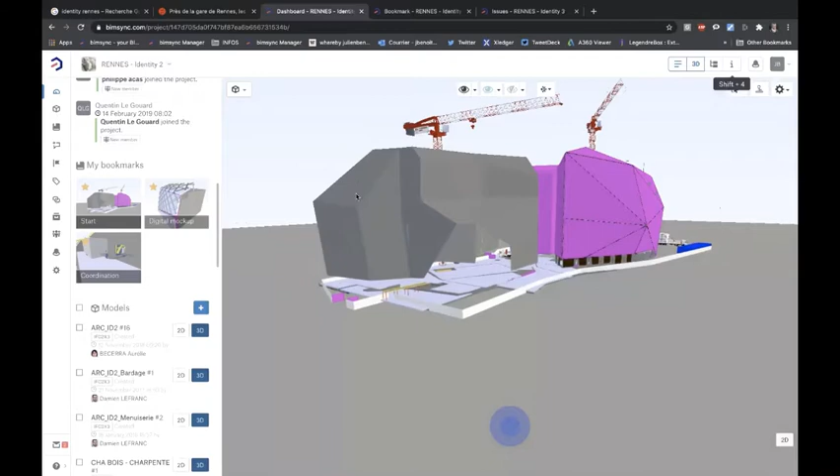I will start with one of these buildings, and I will strip it down in a way so you can see how many models it has been consistent of, and explain a bit what's been done on the project.

So you can see here that this is a focus on the number 2 building. So this is number 1, number 2, and number 3 in the back. I will focus on this one for now and show you different aspects of it.

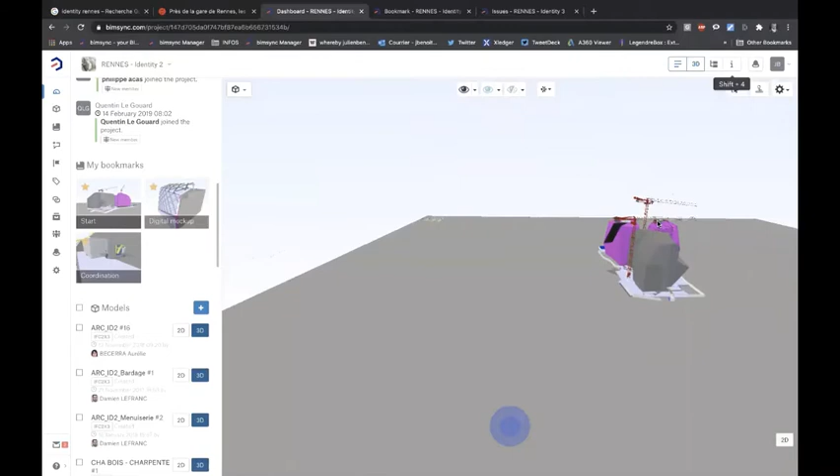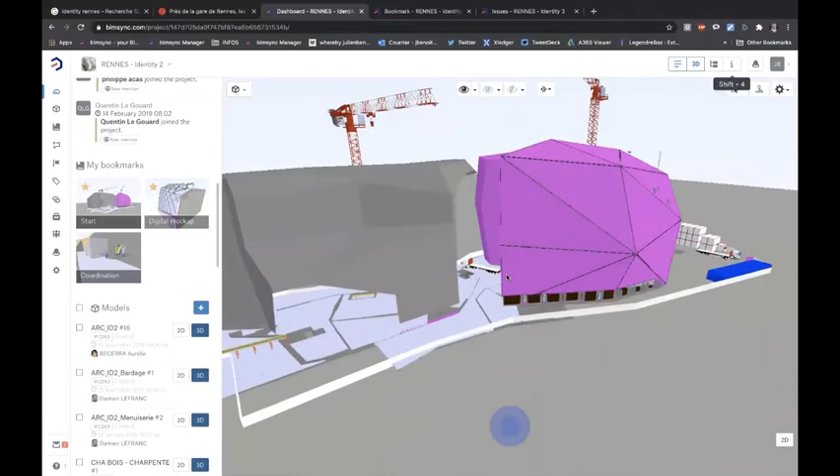As you can see, it's also been assembled with the site installation for better understanding of health and safety on site and security assessment. So it was kind of needed to have this in place. There's a lot of nice detail in this model, including the site installation, formwork, storage area, trucks, and all that. It's kind of cool to see an advanced, detailed project like that.

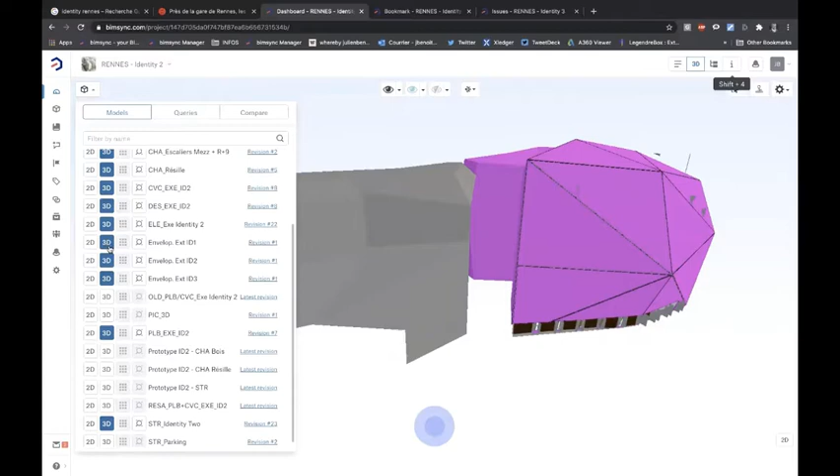So let me show you a bit more about this very building, number 2. I will remove from the viewer some of the unnecessary models - the parking lot, the installations on site, and the mock-ups for the 2 different buildings. So here we go, we have only one building now.

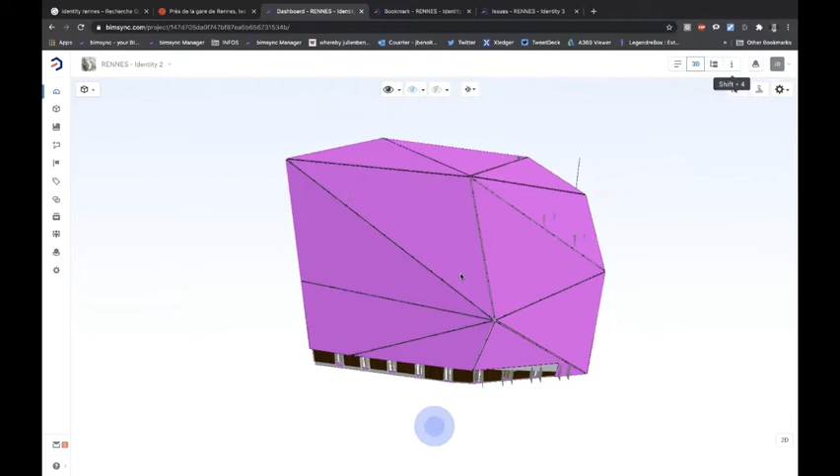So the strange colored shape you see was issued by the architect as the global or overall shape you shouldn't go through, like the concept shape you need to follow. Now, stripping it down, you will discover how it's done. This is called the envelope, the overall shell of the building. As you can see, the shapes are a bit crazy.

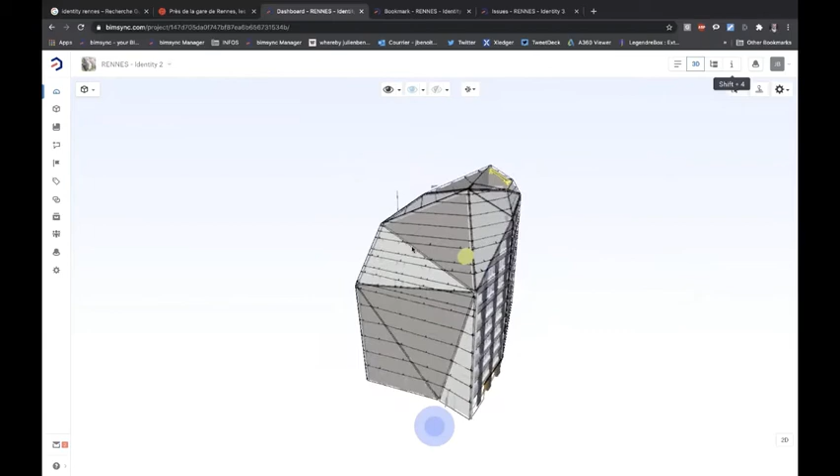It's like it's supposed to represent a broken stone, broken into 3 parts. So this is one of the parts of the stone. You have tilted walls, tilted facade, straight facade, and all that. There's a lot of interesting details here, and the composition of the facade itself is also complex with many layers.

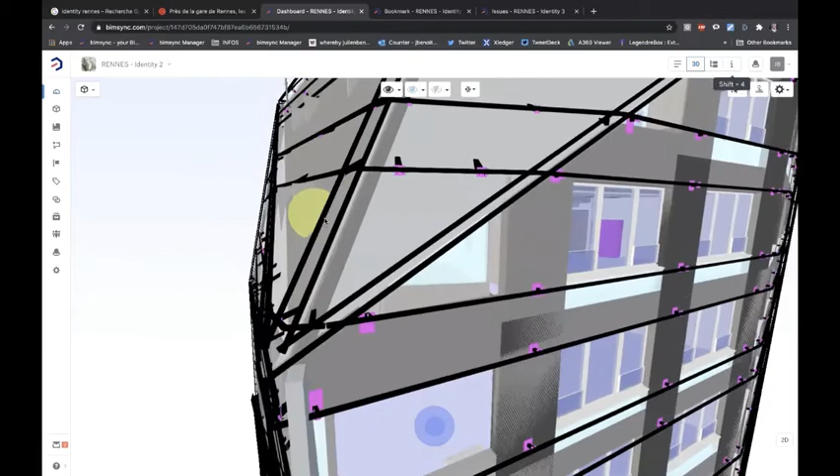I will zoom in a bit, and you will see the level of detail achieved by these models. As you can see, it's an as-built model - it's really what's been put into place by the subcontractors and the contractors.

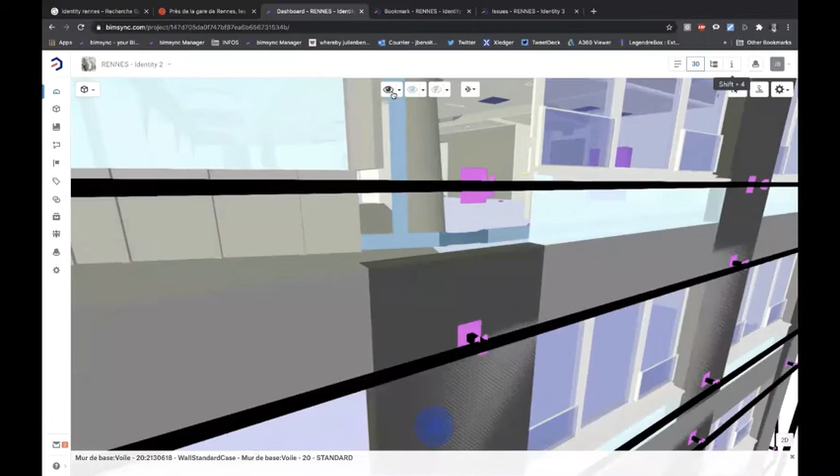So you can see the supports for the framing system, and you can see how detailed these models are. It's not perfect, could be better, but for the time - it's been like 3 years ago - it was just quite impressive.

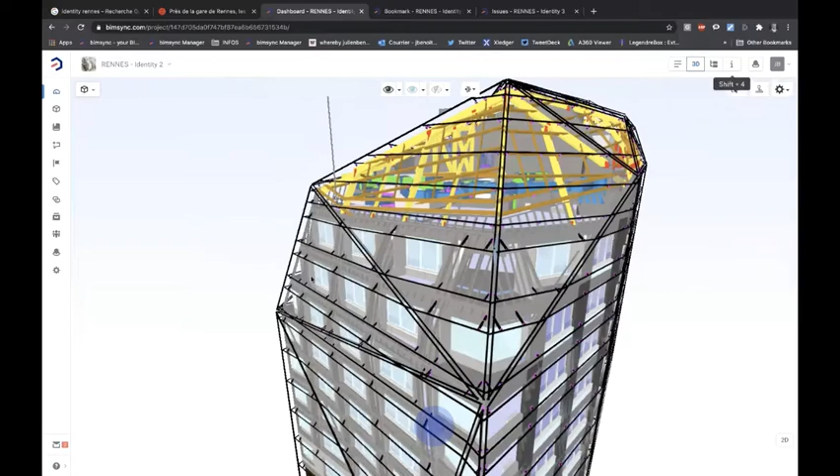So now I will give you a closer look on how it's been assembled together by removing the models one by one. This one, for instance, is like the overall shell, and now you can get a grasp on how detailed this project is. You see there's steel framing involved with these elements coming from Tekla Structures.

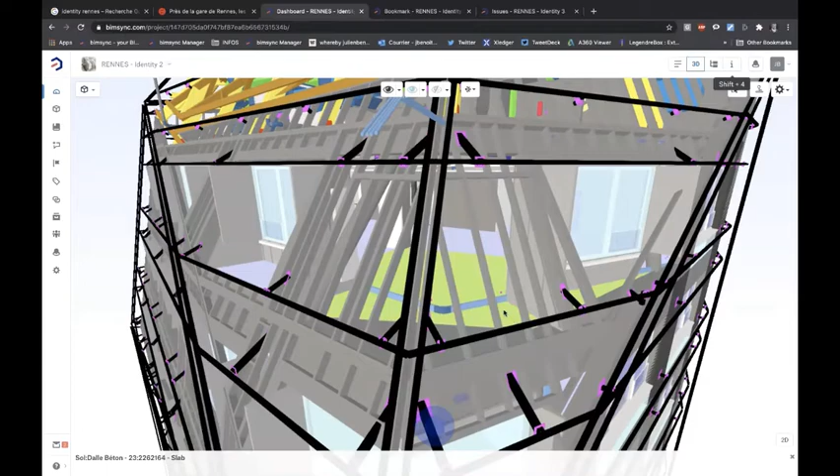These elements are wooden framing elements coming from cadwork software. And the rest is assembled on top of a concrete structure that was modeled in Revit.

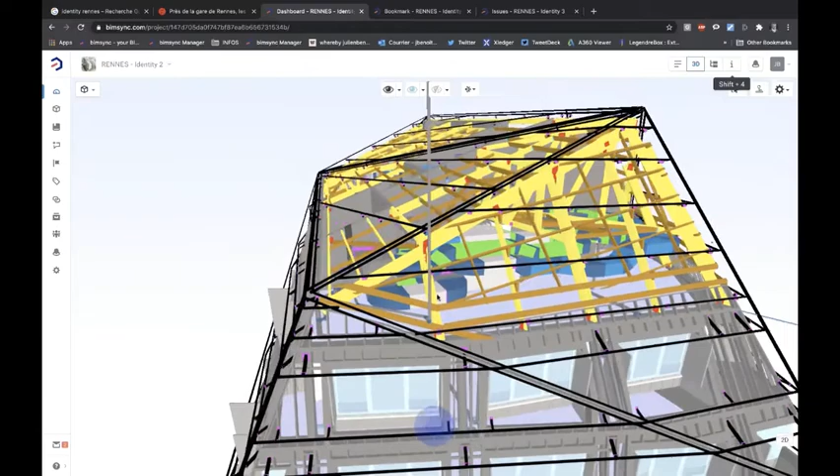So this is for the structural part, and all these elements have been put together in this model so we can actually have proper coordination, because from these crazy angles and crazy shapes, there's no way one can achieve proper coordination without models.

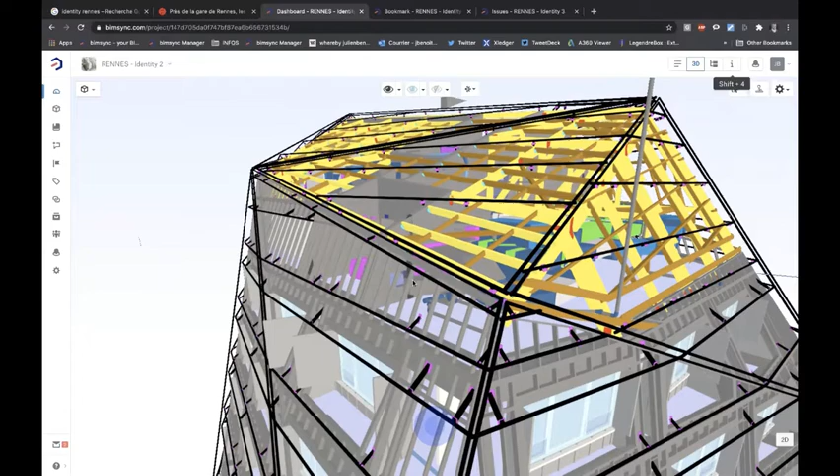You could try with drawings, but it will fail at some point, because it's been basically designed by a software that is able to deliver these kinds of shapes. So once the design started in an authoring tool able to deliver such shapes, you need to follow up and do the same with the construction phase.

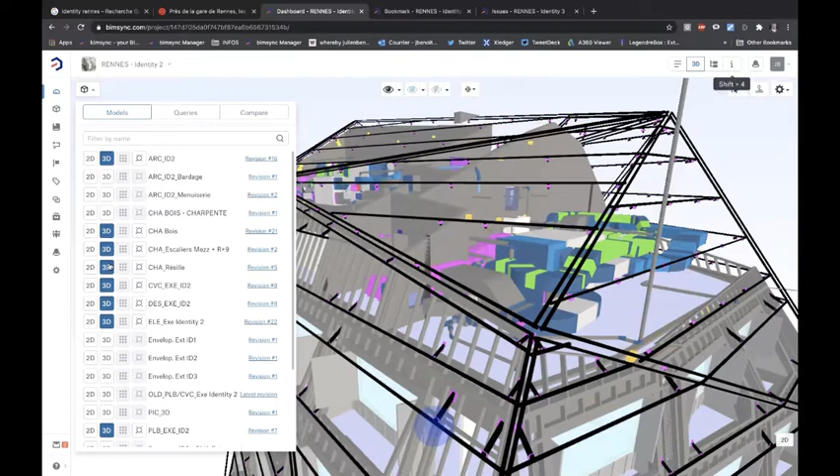So let's strip it down a bit more. I will remove some of the facade. So you see the wood is going now, the structural framing, the steel framing, and you can see now there's mostly the concrete that is left. There's some specific parts, like this staircase which is in steel, so I will remove that as well.

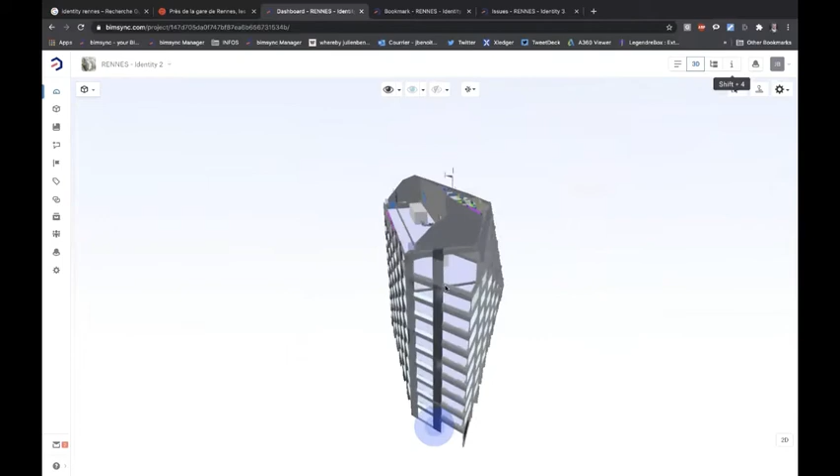And then it will be left with the concrete structure and all the MEP networks and installations. This is also part of the challenge of doing proper coordination - you need to have almost everything modeled. Everything that takes space in the building needs to be modeled and assembled in a model so you can actually coordinate all that.

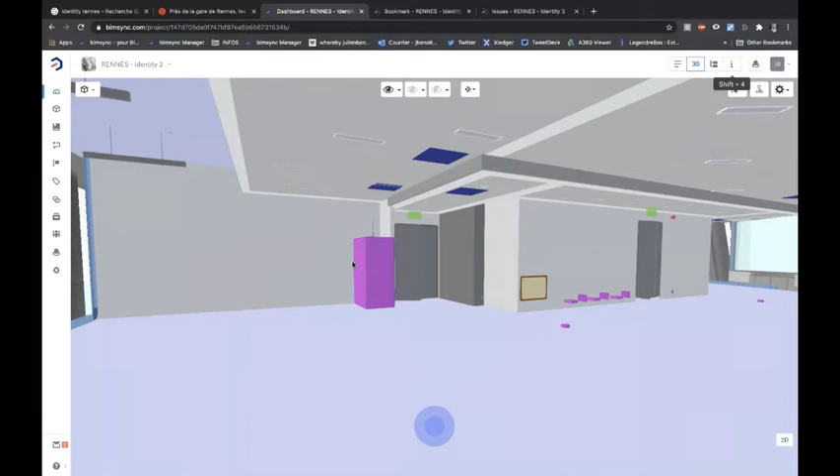And again, all this has been issued via the IFC format. I will remove some of this so you can have a glance on how difficult and detailed it is. That's the level of detail we got to on this model, on this project.

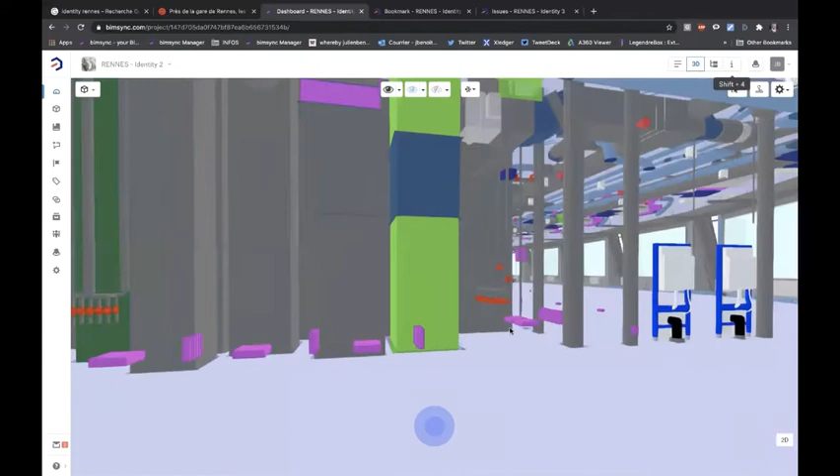So maybe it's too much, maybe it's not enough, I don't know, I can't tell really. But what I know is that without a proper standard to share this information and assemble it together in such a platform, there's no way we do that without an open standard.

So everyone was able, every subcontractor was allowed to use whatever authoring software they wanted, but it was mandatory that along with their drawings and detailed descriptions and all that, they issue one or several IFC files in the 2x3 format at the time.

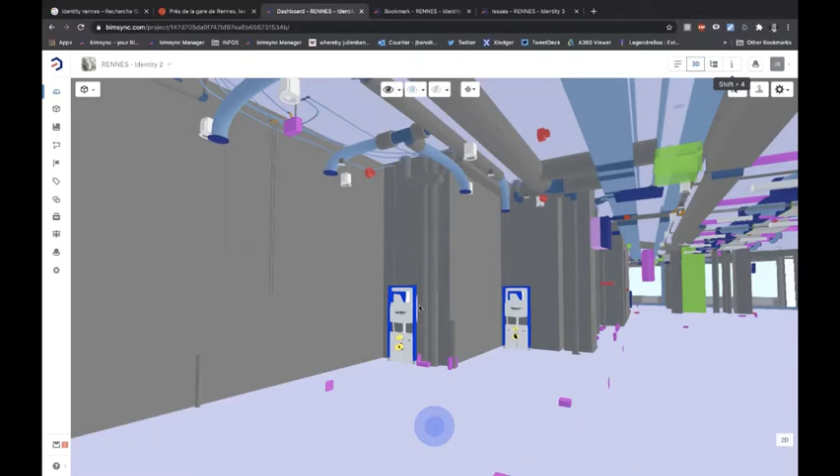And this is what you have in front of you now. This is the result, and it really was successful. And the construction site team, the site managers, were not really convinced at the beginning because they thought it was a lot of extra effort to put in.

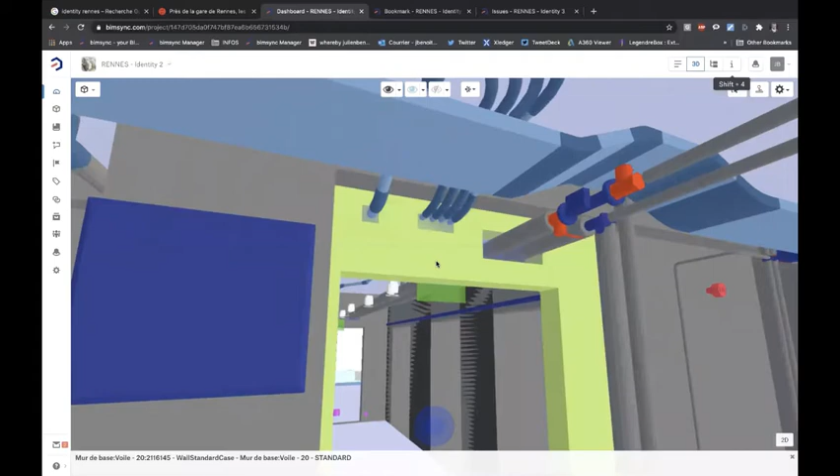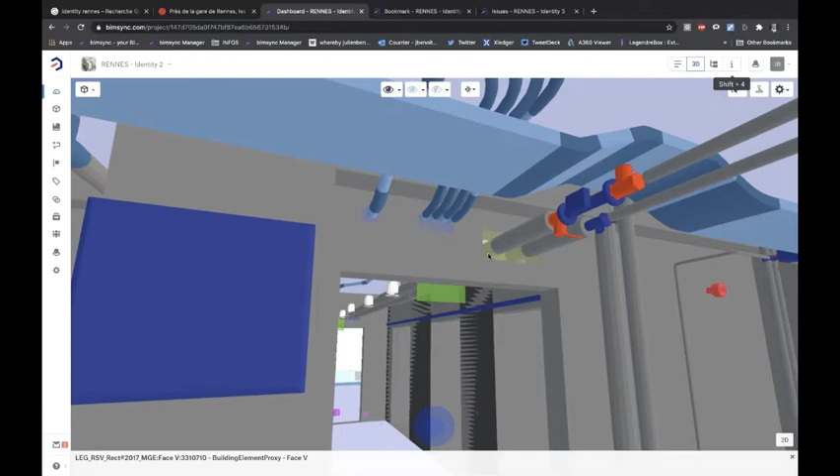But look at the details here. You see this concrete part has been - in this concrete part, 3 holes have been set into place because this is cast in place concrete. This concrete has been poured in place. So you see the result of a perfect, or close to perfect, coordination on this construction site. You see in the model how precise and accurate it is, because that's been really well done at the time by some of my previous colleagues.

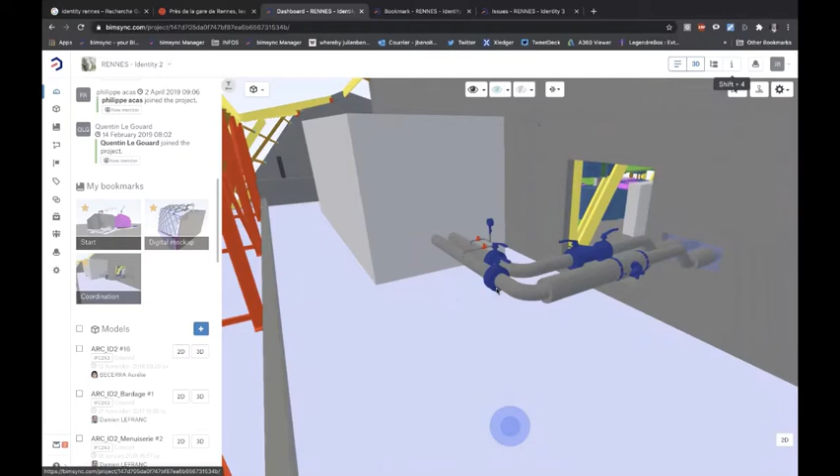I can show you another example I saved earlier, and this example is here. So you see how important it is to have proper models assembled together for proper coordination, so you don't have to crush concrete on site or drill a specific hole that is noisy and costly. Just set the design and coordinate it correctly first, and that will be good for you.

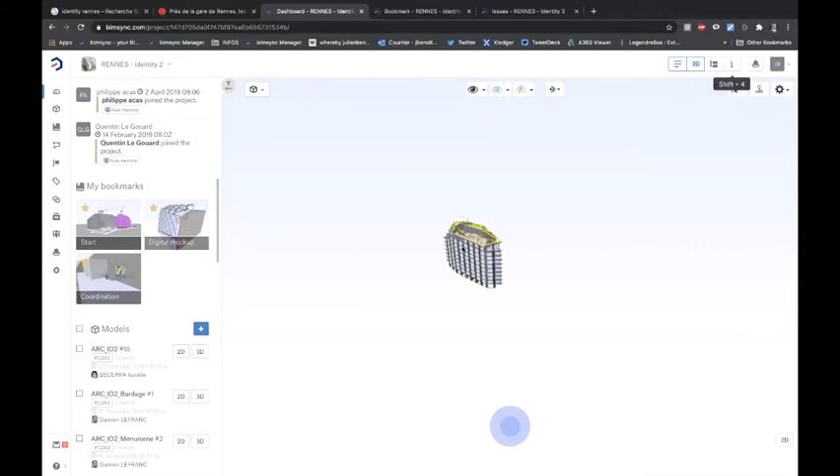So another great use of these open standards on this project was not only to assemble together and coordinate things so you can actually build it on site, but it was also to define and design the final pieces and assemblies. So it's this example here.

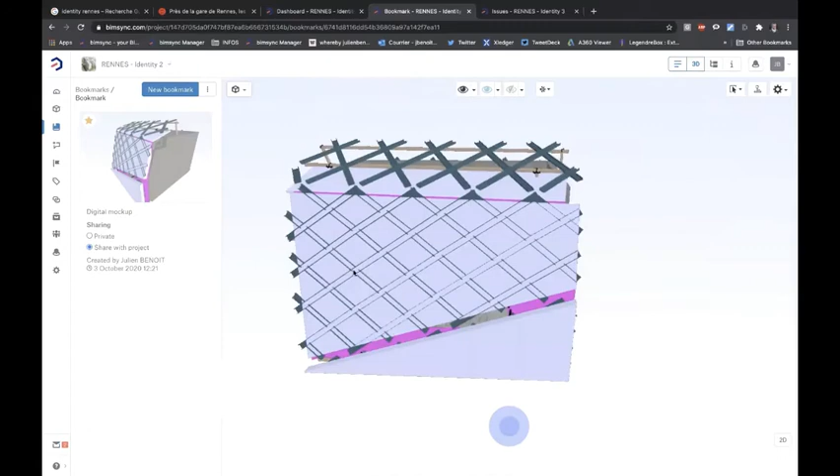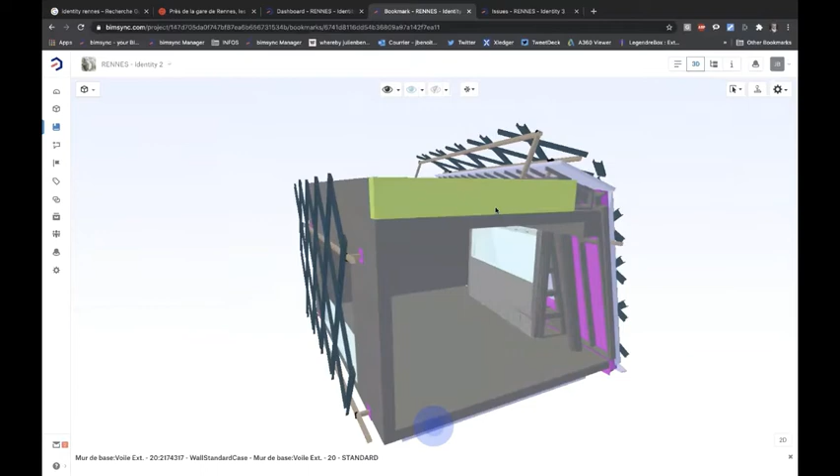It's been a digital mock-up that was achieved prior to the construction phase with open standards, because there are like 4 or 5 people designing together some piece of it, so it can be validated by the architect and the quality checkers and all that before we start to build the entire building.

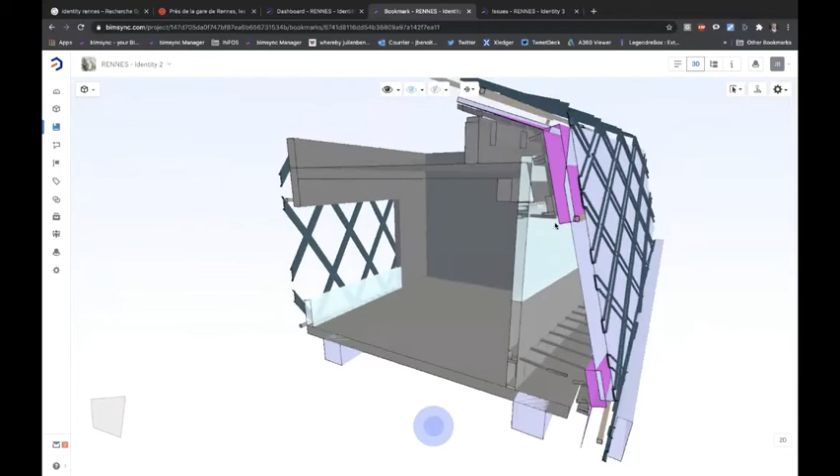So if I show you the amount of detail, you can see that the shapes are a bit crazy, and it's a challenge to achieve this. So you see there's a complex framing here that is holding together a shell, and is holding together another one, etc. I can't explain all the details involved here, but this is the kind of digital mock-up that...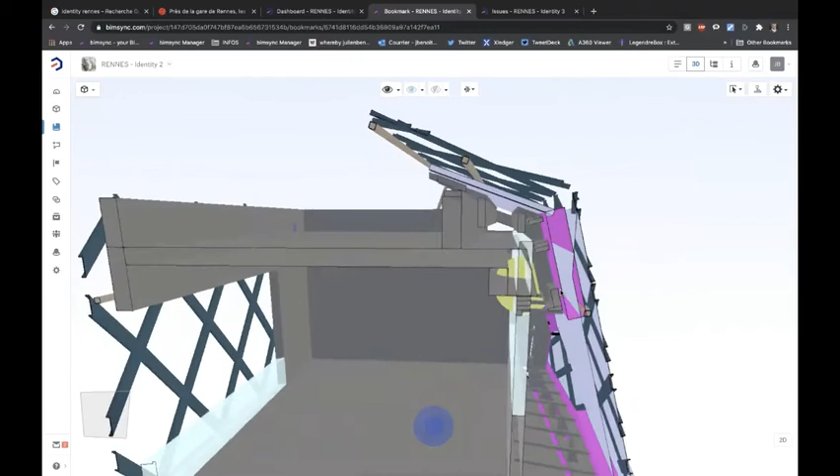Was at the very start of the construction process to validate the choices, the material, the thickness, the way you fix things together, the way you assemble things together. And it was only possible because everyone was using the same file format, the IFC format.

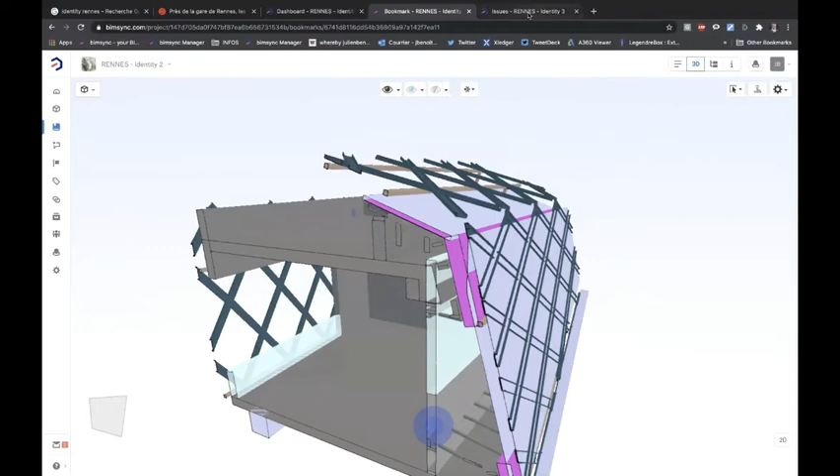Also, it was not only about models, it was also about collaboration. And on the last example I will use on this project, it's about coordination. How will you achieve proper coordination and communication with open standards?

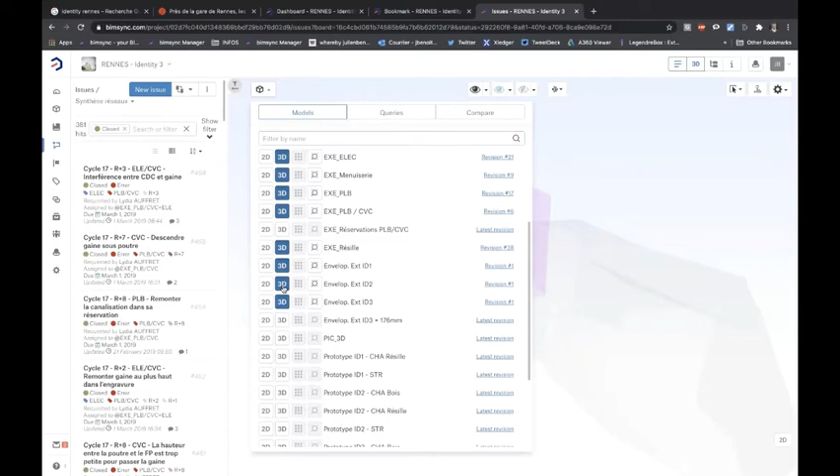So again, I will focus on a different building, identity number 3 on this one. I will remove some of the unnecessary models here, so we can have a closer look at this one. And I will also strip it down a bit so you can see what's going on behind it.

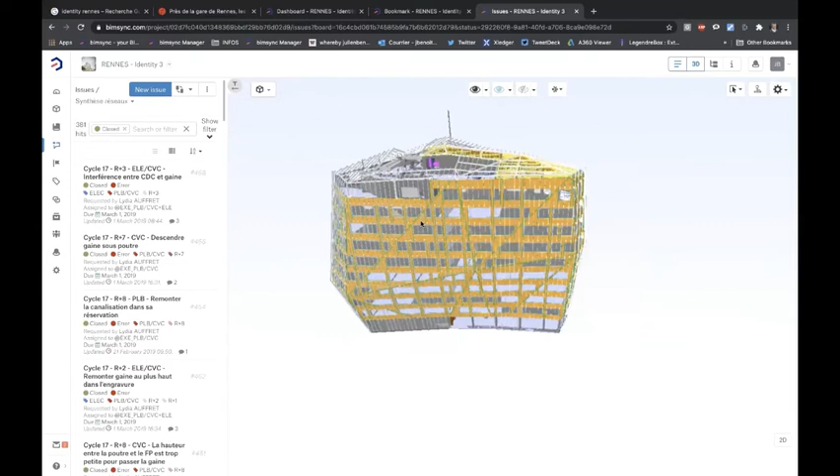Again, I don't have to comment much on this - you will see it's a complex building. A lot of things are happening in the back. There's different layers on the facade with different types of framing and steel framing involved. And of course, it's a modern office building, so there are a lot of networks inside: ventilation, heating, plumbing, and all that.

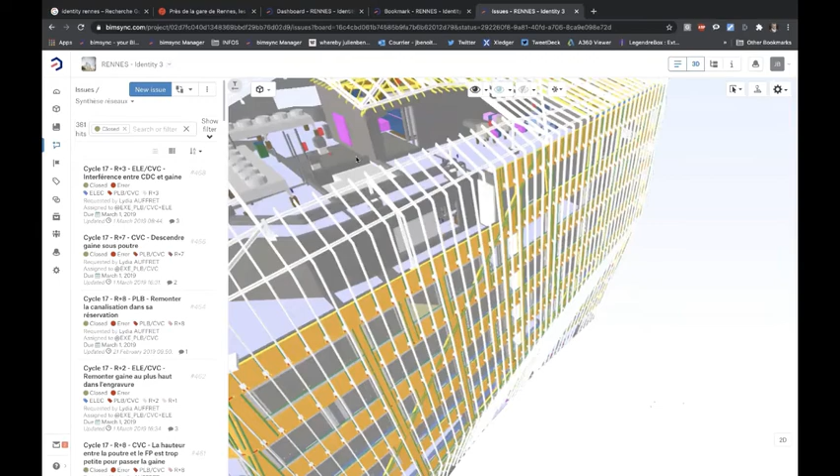So a way to ensure that everyone can access proper communication around coordination, so you don't have to send too many documents, emails, or other ways - there's another standard that's been used intensively on this project. It's called, and I talked about this earlier, the BCF format, BIM Collaboration Format.

So what it does is you raise an issue, you raise a problem because someone is looking into details and sees that there's a coordination issue at some place. For instance, on the 7th floor, there's MEP stuff that's not right. So you can zoom and see a snapshot - you see here this pipe is having an interference with the structural beam, the concrete beam.

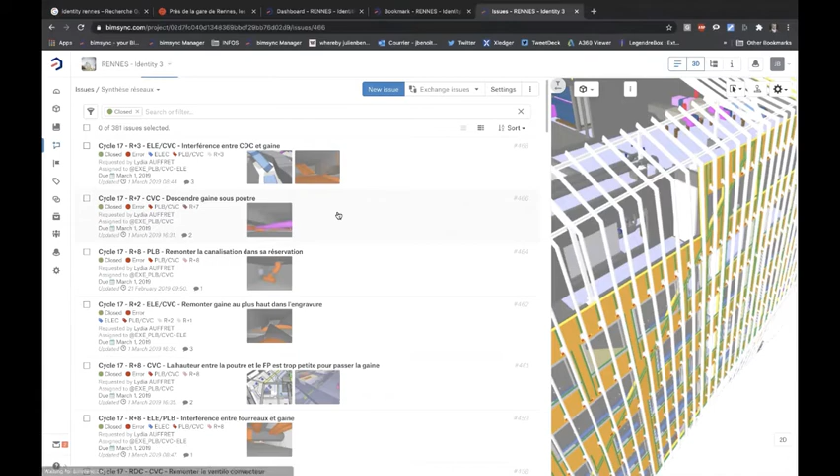So the person in charge of coordination set an issue out of this clash, you would call it a clash, and assigned it to a team, which is the guys in charge of the ventilation here in this plumbing and ventilation. In that case, with a tag for the floor and a tag for the trade, with due date and all that, so you can actually monitor and follow up on the trouble you saw.

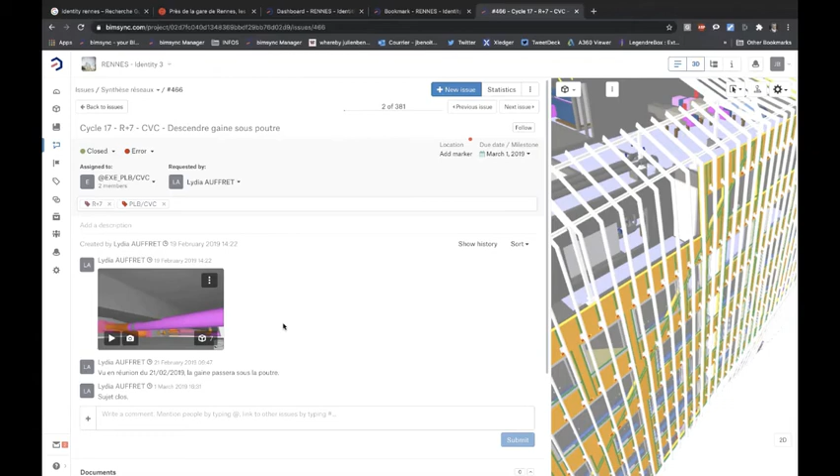So people will be assigned this issue and will check it online and see, oh, I'm in charge of this, so I need to do something. So they will be able to look at the issue and they will also be able to recreate this point of view. And that's the power of this BCF format. Because you're not only saving data like names, teams, and status and all that, you're also saving viewpoints and elements so you can see them in the model at the same time you click on this little play button.

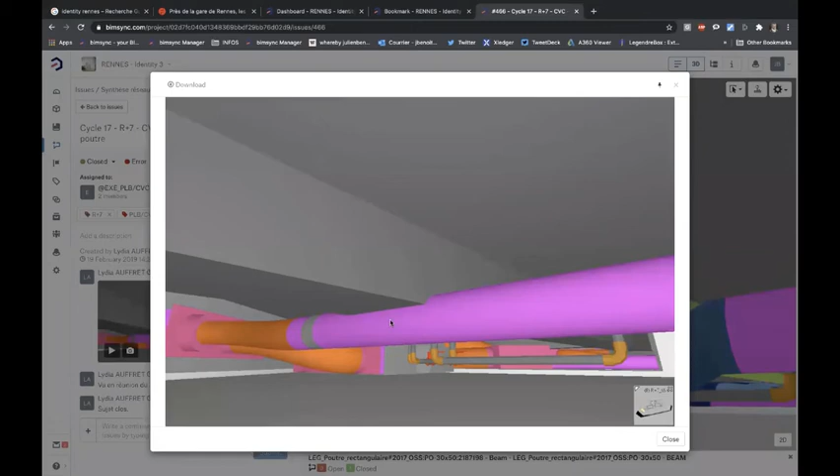So you see previously the pipe was going through and having interference, and now in the updated model, as you can see on the right, this pipe has been changed, so now it's clear under the beam. Done. So now you see that this issue is closed.

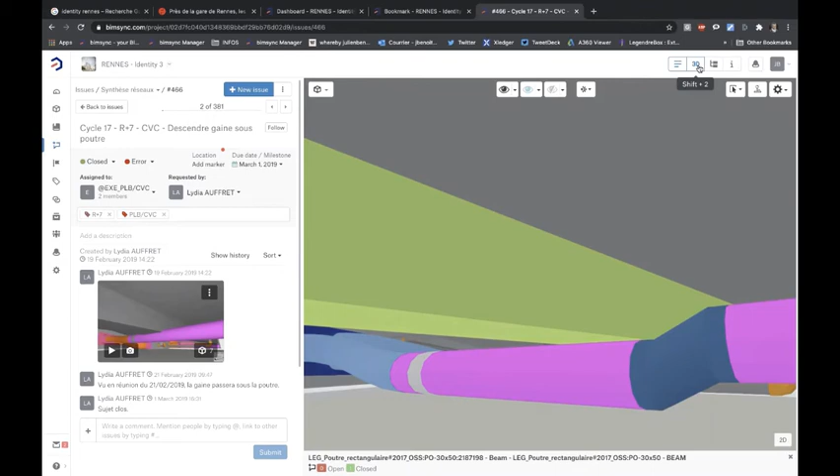And it's been really a journey because, again, it was like early days in a way, and it was not mandatory at the time to collaborate this way, but it's been proven really, really successful on this project. And everyone involved in this coordination process and the site manager also definitely agreed at the end that the next project they will have to do this way.

They want to use open standards. They want to use IFC. They want to use BCF to collaborate on such a large project.

So this is the last part of this presentation. I'd like to discuss a bit about the future and the possibilities of open standards in the construction industry. To me, the different areas I see improvements will be that first, there will be no discussion around open standards as they are, IFC, BCF, MVD, that the entire industry will acknowledge that that's the way to go. I'm not sure it's the case today, even though it looks like it, but I really like to see it as rock solid standards for the industry with a wider adoption for every software around the planet, around industry, construction industry, being able to deliver proper IFC files, maybe in a different way, maybe it has to change. Yes, there are things that needs to change, but this will come for sure.